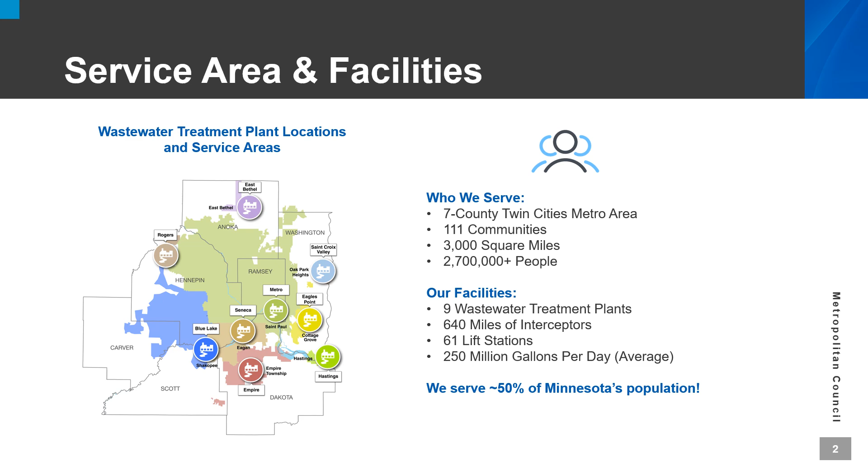MCES focuses on wastewater collection and treatment, while local communities manage drinking water and stormwater treatment. Now that you have an understanding of MCES, let's take a look at the planned improvements for the Forest Lake area.

This project will repair the sewer pipe, also known as an interceptor, located between Fenway Avenue and Highway 61, from Headwaters Parkway to 180th Street North in South Forest Lake. The interceptor runs north to south, going through a portion of the Tanners Brook golf course.

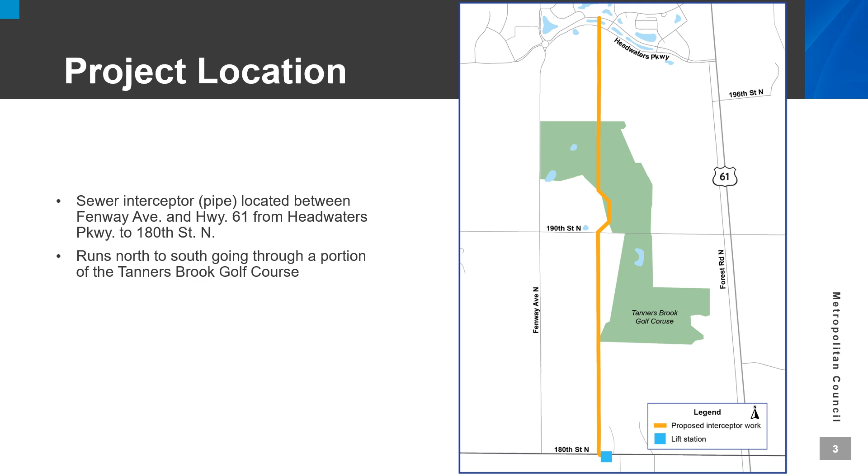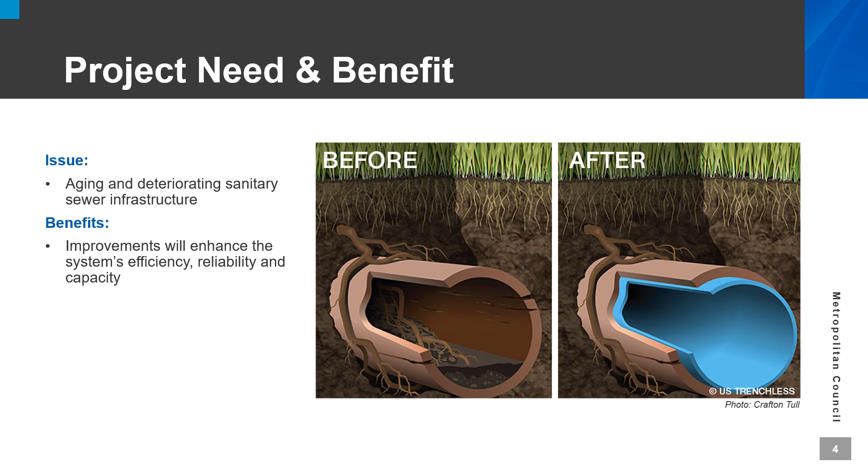The sewer interceptor is deteriorating due to its age. To continue safely managing the area's wastewater, it must be repaired. The repairs will not only fix but enhance the system's efficiency, reliability, and capacity for years to come.

To repair the sewer interceptor, the project team first inspected it to assess the damage and develop a facility plan detailing the recommended improvement process. For this project, a trenchless technology called Cured in Place Pipe, or CIPP, is recommended.

After cleaning the inside of the interceptor, a liner coated with resin is inserted and inflated to conform its shape. Then, the resin is hardened using hot water, steam, or UV light to create a strong new pipe inside the old one. This method is used frequently because it repairs the sewer without digging up streets or yards, minimizing disruption to the surrounding areas.

It also allows the team to work on one section of the interceptor at a time, manhole to manhole.

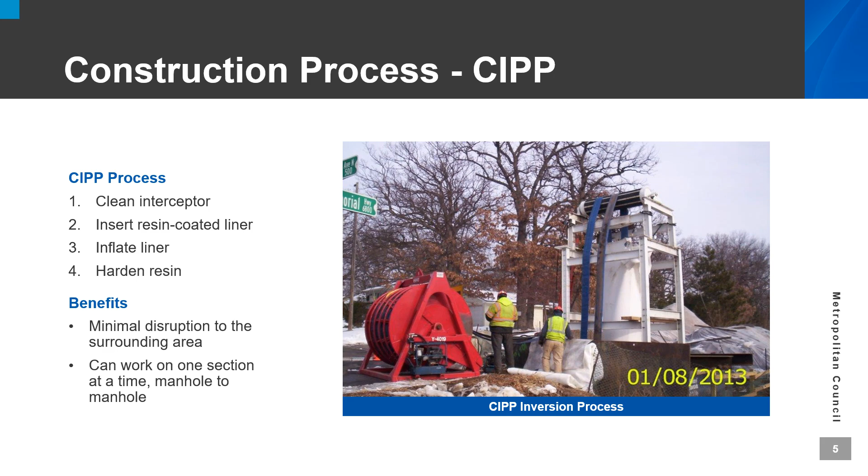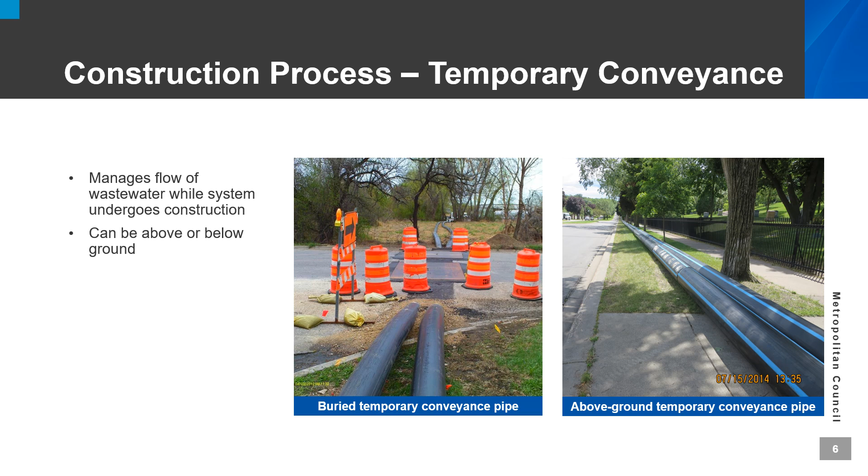A temporary conveyance system will be set up to manage and divert wastewater flow to the wastewater treatment plant during construction of the sewer interceptor. This system can be above or below ground depending on the area constraints and will be determined once a construction contractor has been selected. Following construction, any disturbed areas, such as landscaping or pavement, will be restored to their original condition.

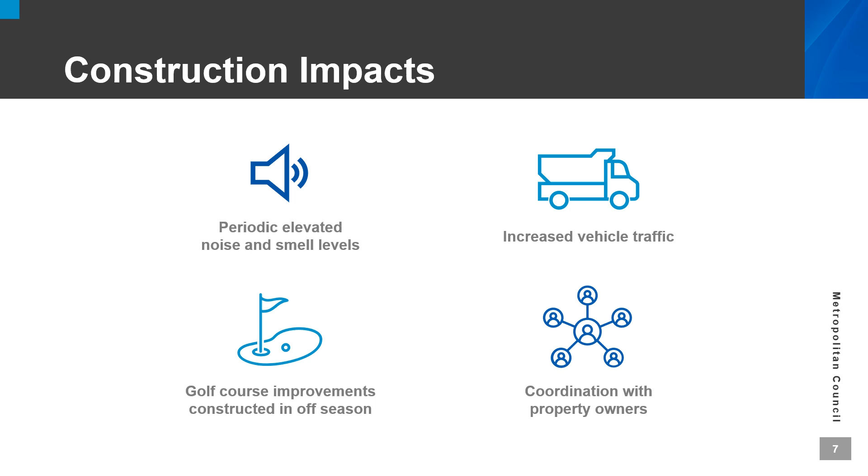We won't know the full extent of construction impacts until a construction contractor has been selected. However, there may be higher levels of noise, occasional odors, and increased vehicle traffic throughout the project area. To minimize disruption to the Tanners Brook golf course, the work that passes through the course will be scheduled for the off-season. The project team will also work closely with the other adjacent property owners to ensure disruptions are minimized.

We are currently in the design phase of the project, during which we are finalizing the facility plan that will outline the details of the construction process. The next immediate steps in the design phase include a public hearing, where the project team will present more specific details included in the facility plan and collect comments for the public record.

Comments will be incorporated, and once adopted by the Council, the final facility plan will be submitted to the MPCA for approval. Once approved, the project team can apply for funding to construct the improvements. If funding is secured, the project is anticipated to be constructed in 2025 and 2026, with restoration work taking place in spring 2027.